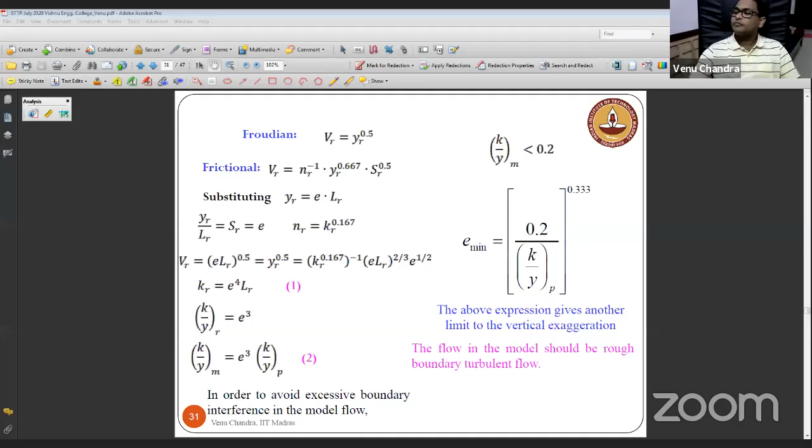So the title, as I said, is how we do physical model studies. So first let me show some photographs.

So now if I want to estimate what kind of sediment load is coming in that water, and how this breaching happened. Breaching can happen due to overtopping, or through piping. What kind of breach, because this is also similar to your dam break analysis. So if I want to generate data for dam break flow analysis, because most dams across the globe are old, then somewhere either today or tomorrow or down the line a few years later, you have to break those dams. But breaking is not just like that. Once the lifespan of the dam is over, you have to smoothly remove it from that location without affecting the downstream areas, the public, and the properties. So now the issue is how best you can create the model.

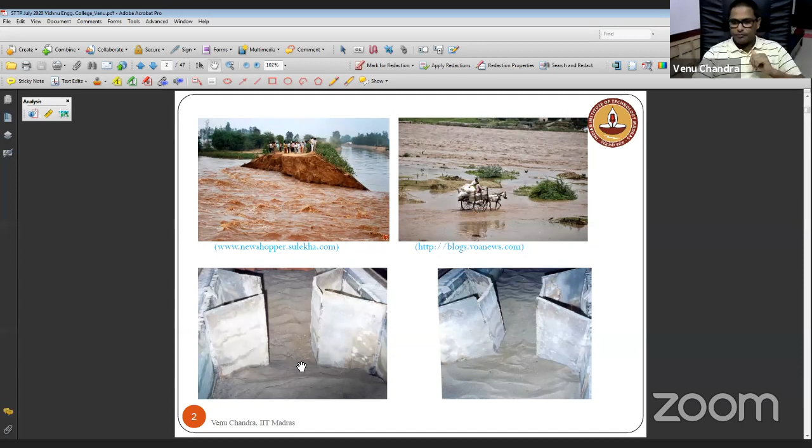No, sir, it's good. Perfectly all right, sir.

So now, who has decided the bridge has to come on the right side of the existing one? Who has decided how much clearance it should have from the existing one? Who has created the spacing of the two supports, or the span of the bridge, deciding it should be this kind of length? And who has decided what kind of footing you are going to prepare?

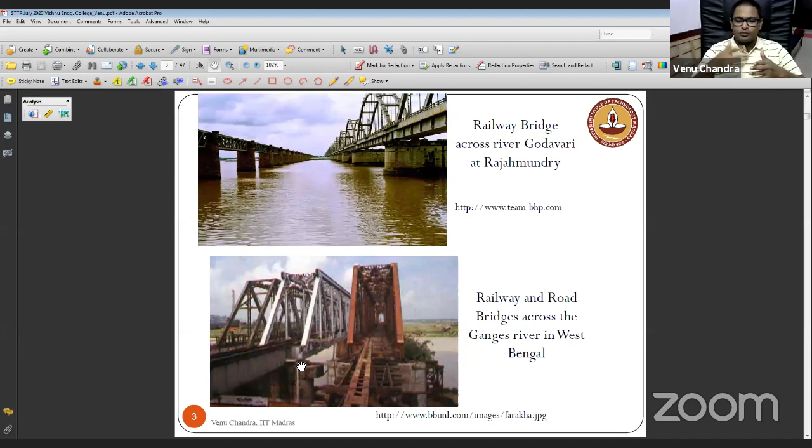Because this is a kind of double D arrangement, with the bottom well, and above the superstructure another double D pier. Now look at the bottom one, it is from West Bengal, a bridge across the Ganges, where very closely so many bridges are there. That means all these supports act like a group of piers. So who decides all these?

This information, or these suggestions, comes from the hydraulic person who does the experiments in different scenarios and finds out what should be the clear spacing between these two piers, or the distance from the existing pier. They give the data, and based on their input, the design is made.

This data then goes to your geotechnical engineer, and later it goes to the structural engineer. All these people work afterward, but the initial job is by the hydraulic person.

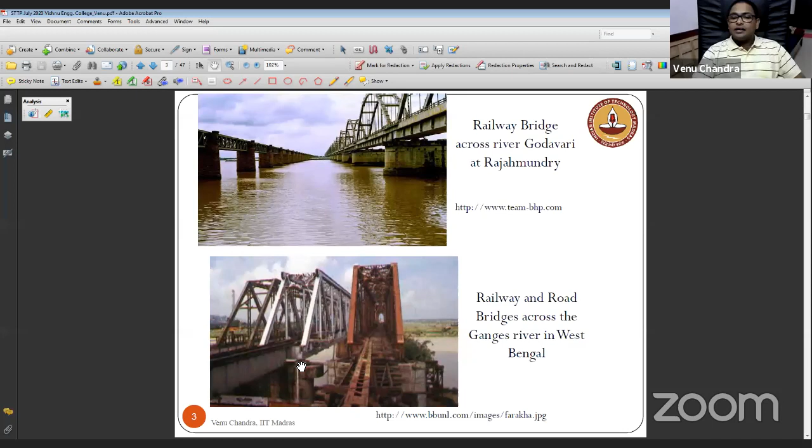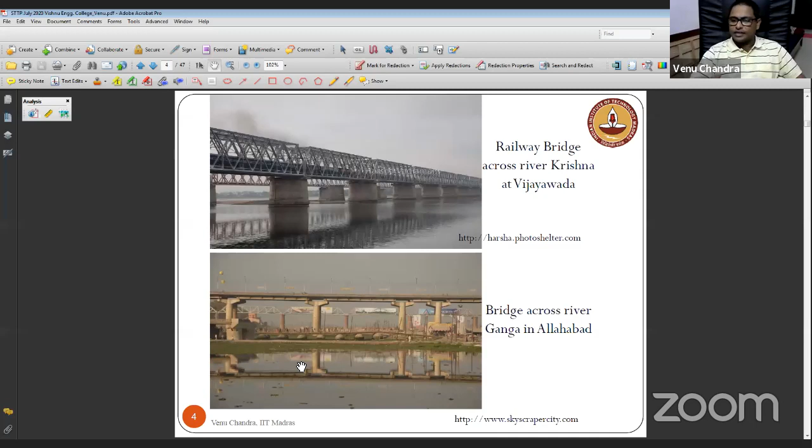Wherever the hydraulic structures, or constructions in contact with water, are concerned, we take care with liquid models. For air models, although the principles are the same, the aeronautical people do it.

Basically here we are talking about measuring velocities, measuring pressure, measuring viscosity, both in liquid models as well as air models. We measure velocities, viscosity forces, surface tension forces, and what kind of friction things are happening there. All these things we measure in physical models based on our requirement.

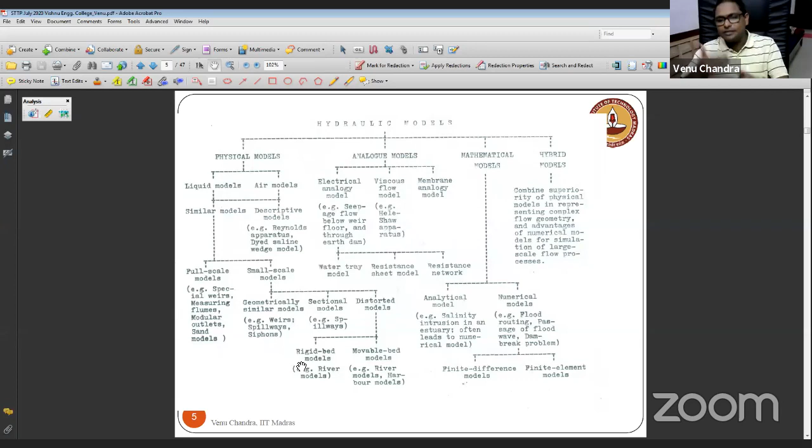You might have studied the gravity force, because the flow is happening due to gravity, so the gravity force is the predominant force. People consider only the Froude number model law, but don't ignore your Reynolds number and also the Weber number. The Reynolds number you consider during your model studies should be as high as you can, so don't only focus on the Froude number.

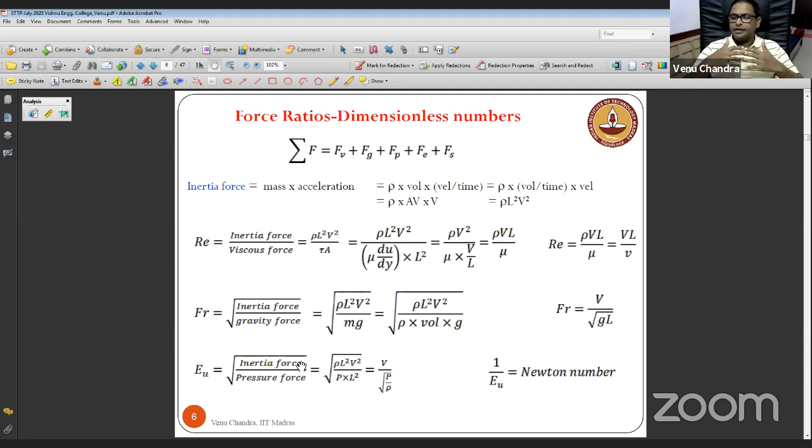Your Weber number should also be high. We are keeping the Reynolds number and Weber number slightly higher because if I want to neglect the scale errors, then it should be really high.

So then what is the procedure? The procedure we are following is: you just leave the bed after leveling it just like that. I'm not going to touch anything on the bed.

The concept here we developed is, if you have two rivers, both of them merging together at some location. The lateral river can join perpendicular or maybe at some angle, it doesn't matter. Then this is your main river.

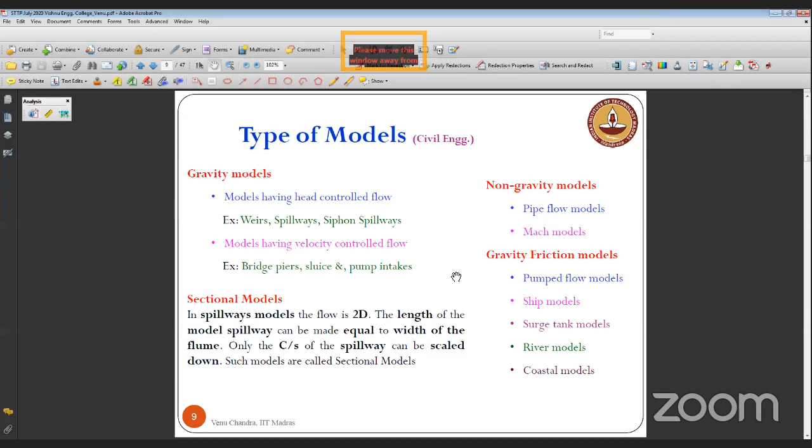So what do you mean by the gravity friction models? That means you are considering the Froude model law and also the viscous model law, that is the Reynolds number. So both the numbers are equally important here. That is actually gravity friction models, but it is slightly difficult. I will tell you how to do that.

Now, as I told you in the earlier slide, you need to take the high Reynolds number, high Weber number when it comes to the river models. Now, if you look at this slide, here horizontal scale and vertical scale I have considered. This I will move through quickly.

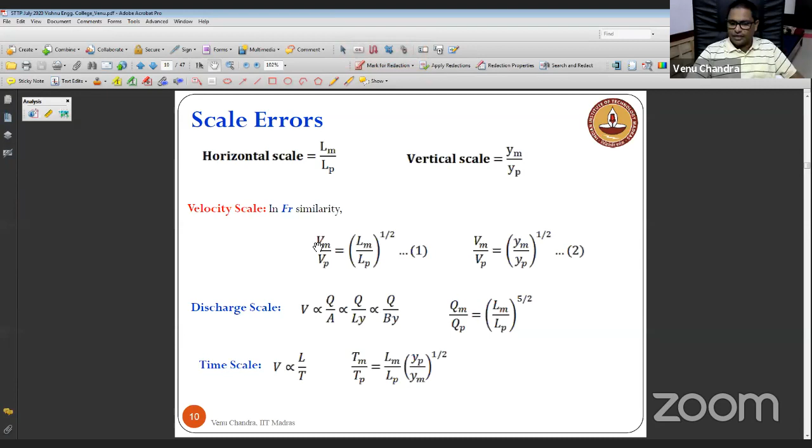Based on the Froude model law, the equation is VR equals under root LR, and based on your viscous model law, you get VR equals nu R divided by 1 by LR. So this is changing.

Now if you look at the example here, if your LR is 1 by 100, then the Froude model law will give you a VR of 1 by 10. But when it goes to the Reynolds, then it is 100 by 1. So there are contradictory things. It is not very difficult if you are rich enough, and if you have a lot of funds from any sponsoring agency.

So you can use different kinds of fluids, both in the model as well as the prototype, then you can create the model. But actually it is not advisable. That's the reason why you have to increase your Reynolds number in the experiments.

So if you ask me what Reynolds number I use for this kind of model study, the river confluence model, it is more than 30,000. That means the flow is highly turbulent. So once it is highly turbulent, then I am neglecting the viscous force. That is the basic idea.

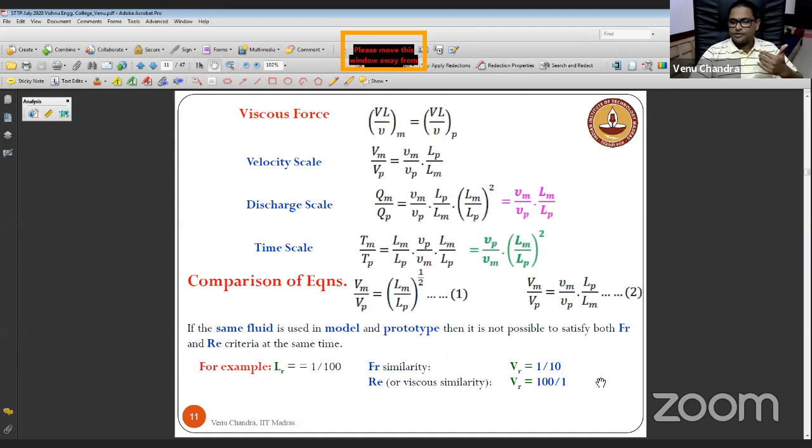Now what we are going to do is the model testing based on the dominant force, but without compromising on the scale errors. So you should minimize the scale errors. If you consider the turbulent flows, I am going for the gravitational force as the predominant force, and if I am going for the ship models, then gravity as well as the viscous forces I am considering.

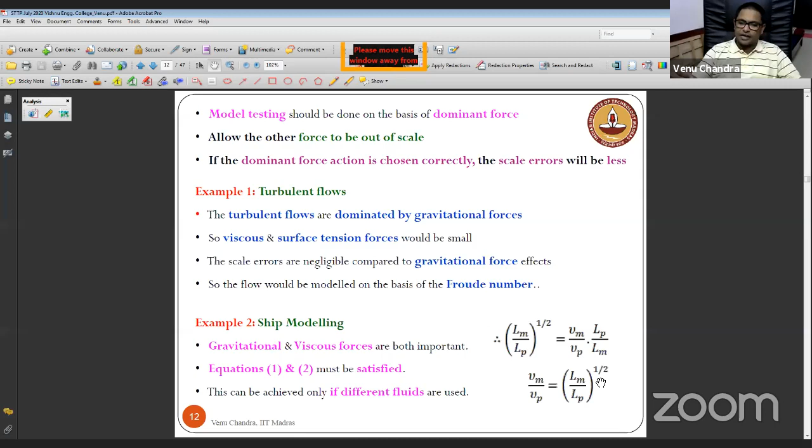But here there is a slightly different mechanism to measure the viscosity of the model in the frictional models. Now the other thing is, when it comes to the techniques, what kind of techniques I have to use to go for the model studies.

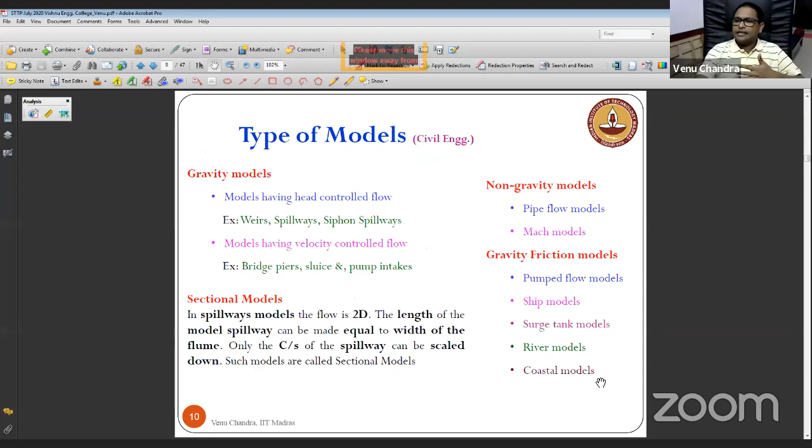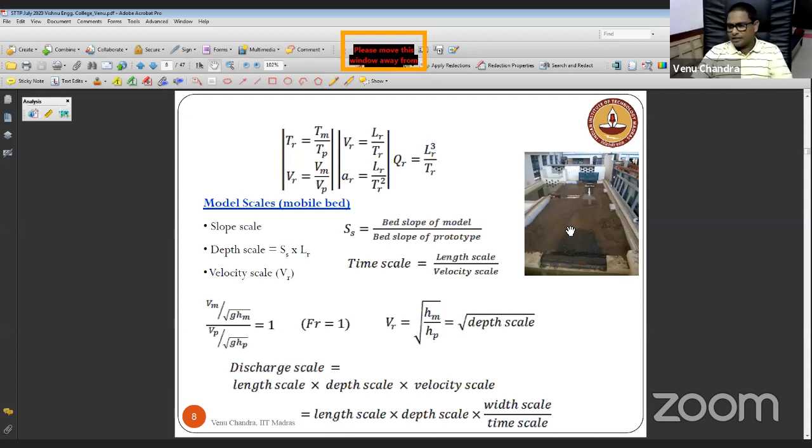So the first one is, you have to construct a watertight basin, then make arrangements for the flow measurement. If I maximize, maybe I can make it a little bigger. I hope this screen is much better - I'm sorry, I didn't know the screen was short.

So anyway, here in this figure, in the downstream we have one V notch, and here one more V notch, and this side also one V notch. Two pipes are coming, and then I can fix a flow meter to this one. So that means for the flow measurement, I am making the arrangement.

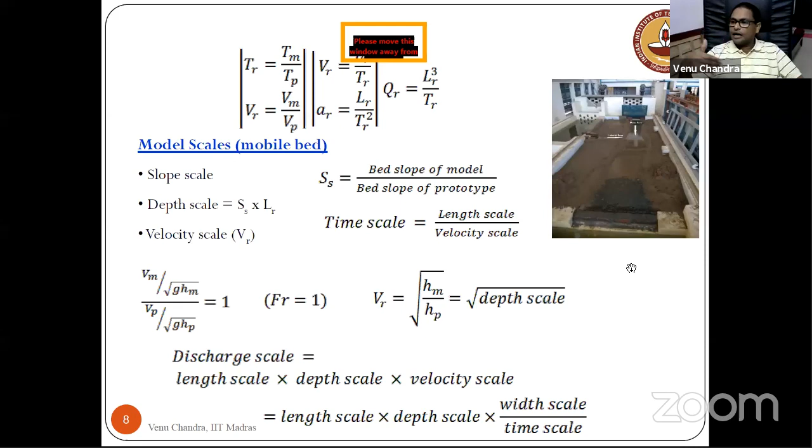Then once it is watertight, what you need to do is calibrate the model - that means whether it is giving good results or not. Once your model is calibrated, and once you develop the confidence that it is giving the exact results, then you can collect the data from your model.

Then what kind of material you can use here - you can use plastics, acrylic sheets, fiberglass, wood, metal plates, stainless steel, or you can also use wood with a kind of paint, otherwise the wood will get damaged.

When friction is your main dominant measuring parameter, you have to see what is your prototype friction and what is your model friction. If using cement mortar or wooden material, what we do in the lab is paint it, because in the field, Manning's N, the roughness coefficient, is about 0.01 to 0.03, which is very small. In the model it should be much smaller. To get that, you paint it and make the surface smoother. Sometimes we varnish the surface first and then do the painting.

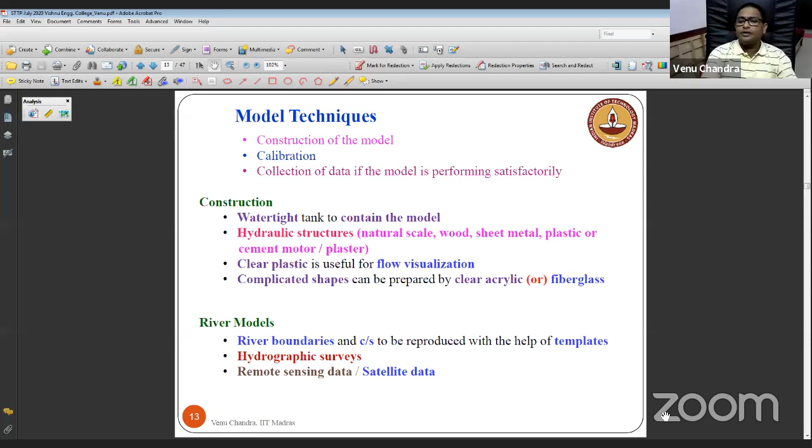Okay, so the model technique here is: initially you construct a watertight chamber. Then if the bed is mobile bed, meaning you put some sediment, or otherwise the bed is rigid bed, in both cases you have to bring your field N value to the model. The N value varies in the prototype from 0.01 to 0.03, and in the model it should be much smaller. So what we do is make the surface a little smoother, either by painting it or applying varnish if using wood material, and if using cement mortar, you definitely have to paint it.

Other than cement mortar and wood, what kind of material can you use for flow visualization? We use acrylic sheets or fiberglass, because you can really look into the flow dynamics and easily measure it. We also use stainless steel or other metal plates, because metal plates can usually be molded. Wooden things sometimes are a problem.

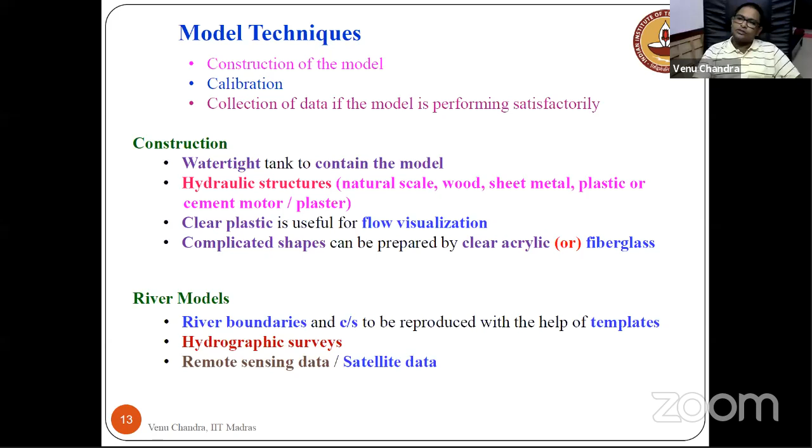So then your objective here is to measure the water depth. You just paint the entire surface and make it a little smooth, because friction is not the issue for you. Make it as smooth as you can, then start allowing the flow and measure the flow depths at different locations. Sometimes, if you go to the field, you are unable to collect the data.

So for that kind of data, we use satellite information. Now this is one setup we created at the Hydraulics Lab. Here you can see one is coming here, one you consider as a river. A V-notch I provided here, and then one more V-notch, and the backside pipe is there. I can put a flow meter.

Then in between, I can keep some baffle walls so that I can reduce the turbulence. Then on this side you can see a kind of channel, the trapezoidal channel, through which the water is going. That channel I consider as the intake canal.

So you are drawing the water, and this idea we got from Vijayawada, where there is a thermal power plant. They are drawing water from the Krishna River. So what kind of sediment load comes here, which is the problem of decreasing the discharge in the intake canal, and how to minimize the sediment load.

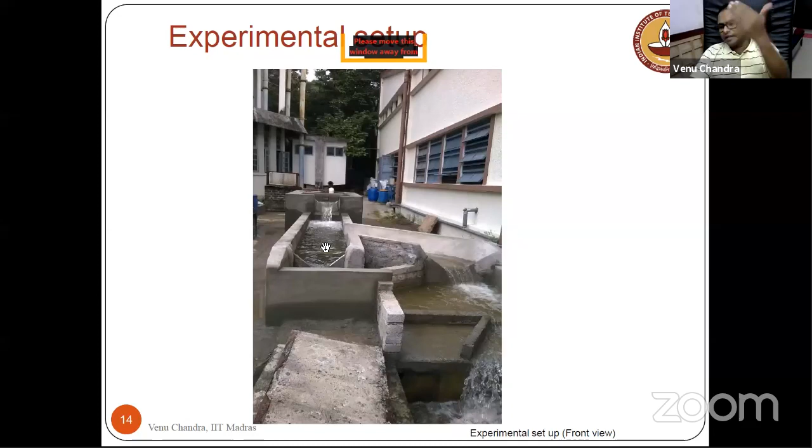This is related to that study. You can collect all the sediment here, and otherwise in the channel, you also collect data from here. In that way, our objective is to find out and minimize what sediment load is entering into your intake canal.

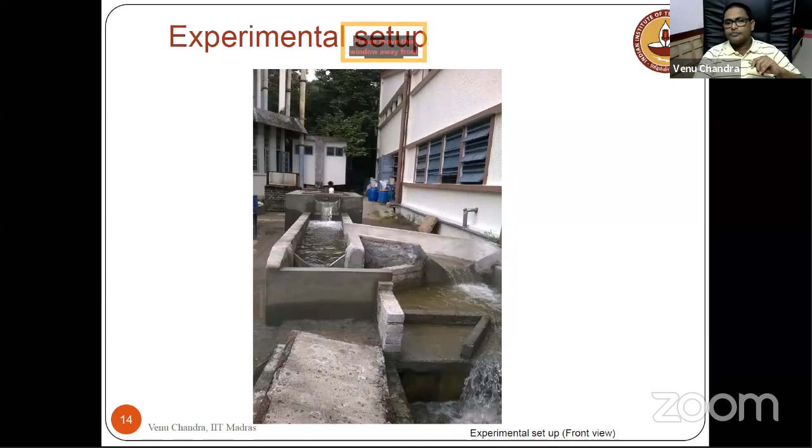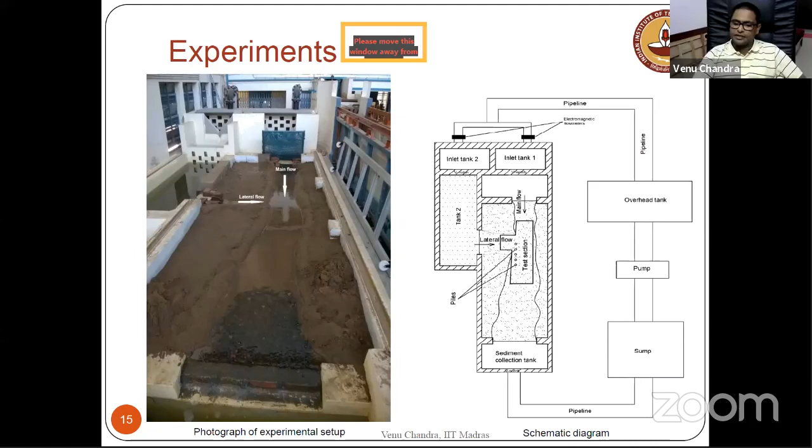You can also read this paper, which came in an ASCE paper. You can look into my profile and go through it. This is also like a river model, as I told you, the confluence model. This is also in my profile, you can check it. How we prepare the model, what are our scales, how we develop the experimental setups, everything you can find out from the papers.

These are the flow meters I was talking about earlier. You can fix the flow meter to these pipelines. Nowadays the price is also not very high, so you can easily fix it. But while fixing, the flow meter should be vertical.

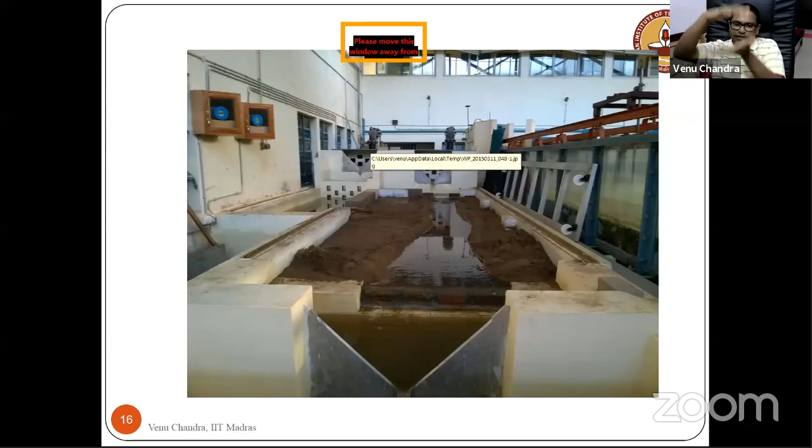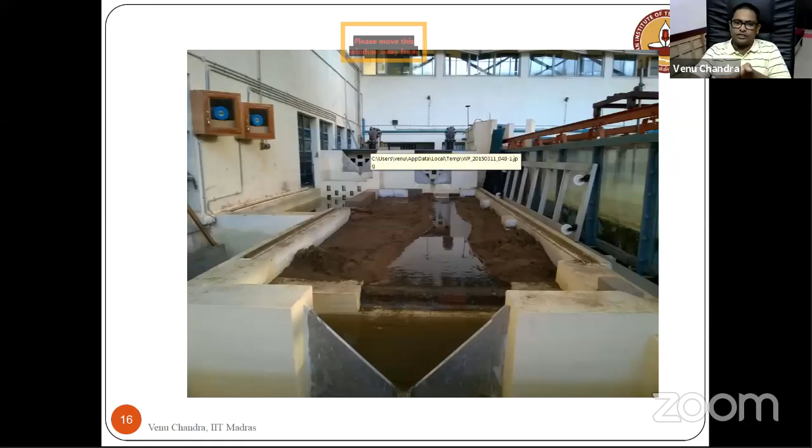That means the water should fill the entire cross section of the flow meter. If it is horizontal, the water level is half full in the pipe, then you cannot really get the values. This you can continuously monitor from the display unit.

If it is the rigid bed model, that is nothing but your roughness, and then the sediment particle. In the rigid bed, the roughness of the bed is offering the friction. If it is the mobile bed model, the sediment is offering the friction. So in both cases, this KR or DR is one and the same.

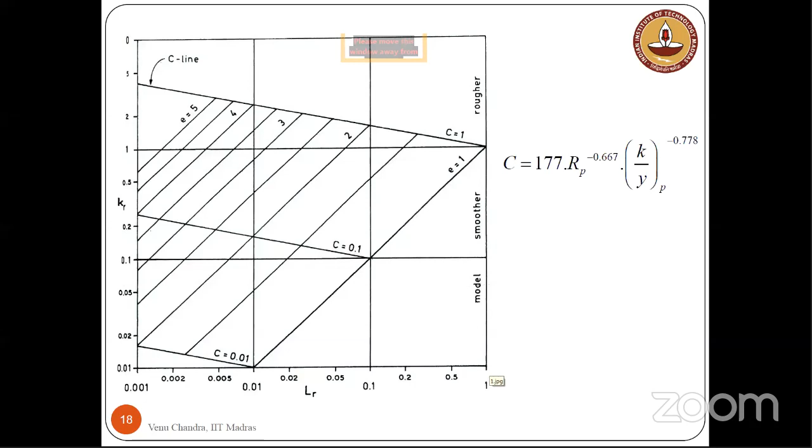This E stands for vertical exaggeration as a function of the depth scale as well as the length scale. Now, how are you classifying your models? If you go for rigid bed models, your main agenda is to measure flood levels, or to find out the capacity of your channel, or to see the propagation of the flood wave, how the wave is coming.

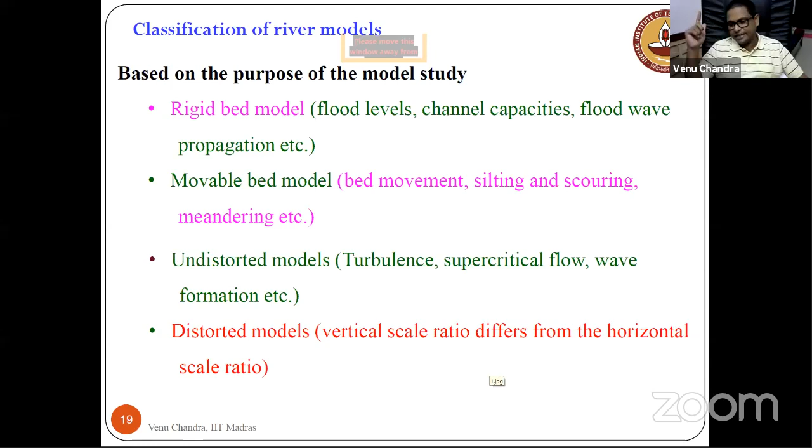But the main issue with undistorted models is the Reynolds number. The Reynolds number drastically comes down if your length scale equals the vertical scale. So you try to keep your vertical scale different than the horizontal scale, then you can increase your Reynolds number. Once the Reynolds number increases, by the formula rho Vd, that means velocity is high.

So that means you are going for turbulent models, so you can minimize your scale effects. Now, what best can you do? You try to keep the turbulence as high as you can. Otherwise there are two issues. One is the velocities will come down, and once the velocities come down, the sediment particles cannot move, but in real conditions the sediment moves when the flow is happening.

That is number one. Number two is, once you make the length scale equal to the depth scale, your flow depth in the model will come down. Once the flow depth decreases, you cannot measure the velocity data properly. So you need sufficient depth. These are the two important things, so please keep them in mind.

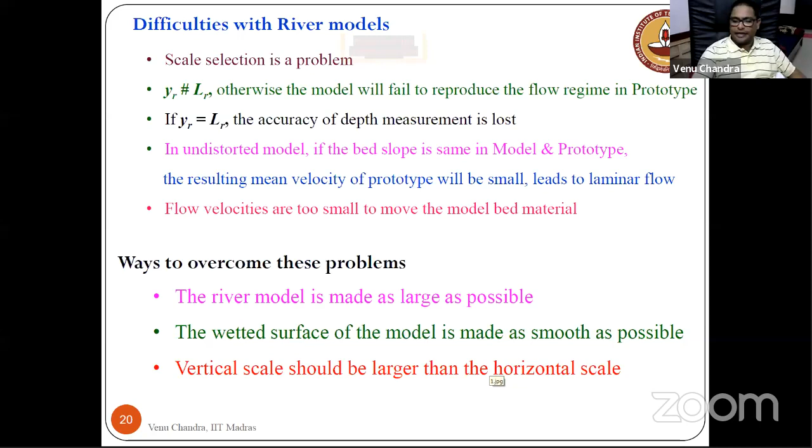Normally we use the length scale in the range of 1 in 2000 to 1 in 100. The earlier model I showed was 1 in 80, that was the vertical scale for that sediment model.

As I told you from the plot, the vertical exaggeration E is a function of depth scale and length scale. You can use different vertical exaggeration values for different models, but it is not a hard and fast rule, it can be adjusted as per your local requirement.

Now, from where have all these resistance formulas been developed? This is a bit of background. Initially for river flow resistance, we didn't have any equations as such, so we started using the existing equations developed for pipe flow for our sediment transport models.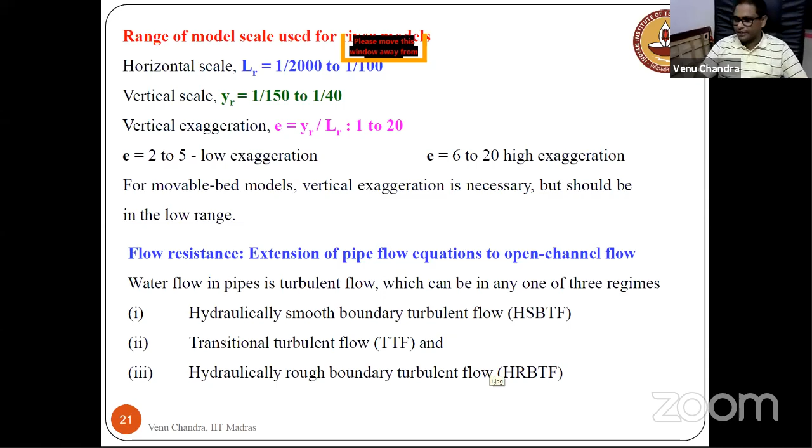What are all the equations we have for pipe flow? The hydraulically smooth boundary, where the boundary is smooth but the flow is turbulent; the rough boundary with turbulent flow; and the transitional turbulent flow. These are the three cases we use.

One minute, something is coming here, some box.

You can see the Darcy-Weisbach equation: HF is equal to FLV square by 2gD.

Then if you consider the hydraulically smooth boundary, but the flow is turbulent, you all very well know from the Moody's diagram. So from the Moody's diagram, what we are going to do? The Moody's diagram tells the friction factor F depends on the Reynolds number, that is one.

The second one is the K by D, or otherwise epsilon by D, or otherwise epsilon by R, where R is the hydraulic radius, or otherwise the hydraulic diameter, or hydraulic mean radius, whatever you call it. So D, or epsilon by R, that epsilon talks about what is the roughness.

Generally what happens, if you see the roughness, any broken pipe near to you, if you just touch the surface, there are small bubbles coming up. So it is having some kind of undulations like this. Then you take the mean value of the projections of the roughness. That tells you what is the equivalent roughness, so that is your K value.

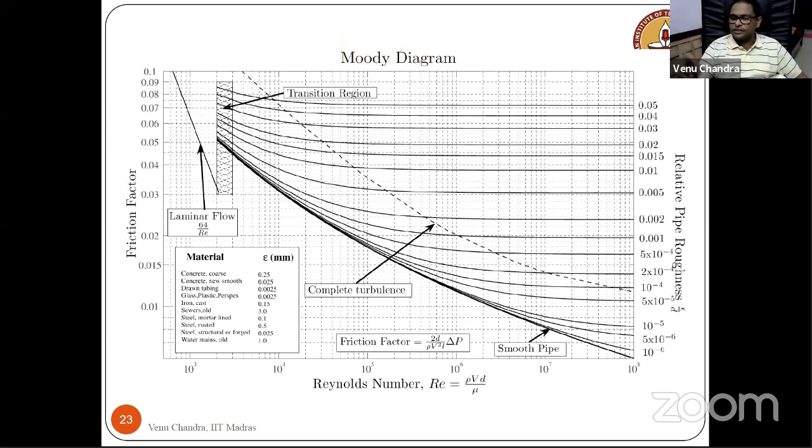So my friction factor depends on both the epsilon by D, or epsilon by R, and the Reynolds number. These are the two different things for the smooth, turbulent, or the transition region.

Then in the box also you can see different kinds of material - steel, mortar lined steel, rusted, water mains, old pipes, concrete, or otherwise the bed is smooth. So you can see all kinds of ranges here.

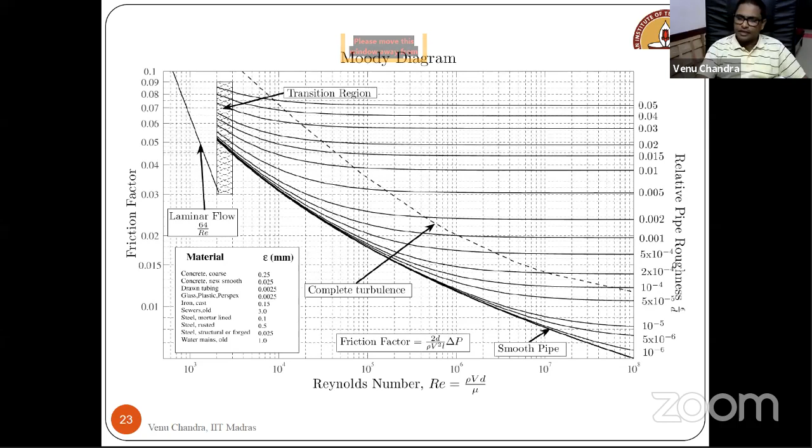The same thing, what we are going to do is use these things to develop our movable bed models. Now in this slide, the other equations you know from your basic fluid mechanics background, but you just try to concentrate on equation 1, given at the bottom.

Here in the center, I am saying the Reynolds number should be higher than, or greater than, the turbulence Reynolds number. So try to remember these subscripts - RE stands for the Reynolds number, and RT stands for the turbulence Reynolds number. Here the Reynolds number is there in the model, and Reynolds number is there in the prototype. But in both cases, your Reynolds number should be greater than the turbulent Reynolds number.

This turbulent Reynolds number is a kind of empirical formula, which we can get from the above equations. So the RT is 800 divided by F, which stands for the friction factor, and K stands for your particle diameter, or surface roughness, then R stands for your hydraulic radius. So from here you can get it - the turbulent Reynolds number is a function of your friction, the particle size or roughness, and your hydraulic radius.

So I am giving everywhere the equation numbers, so you try to use those things. Once you finish the lecture, if you want to solve some problems, you can recall those equations.

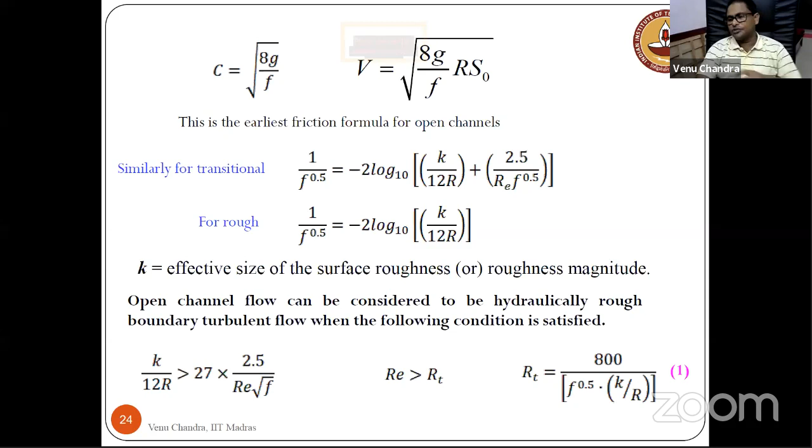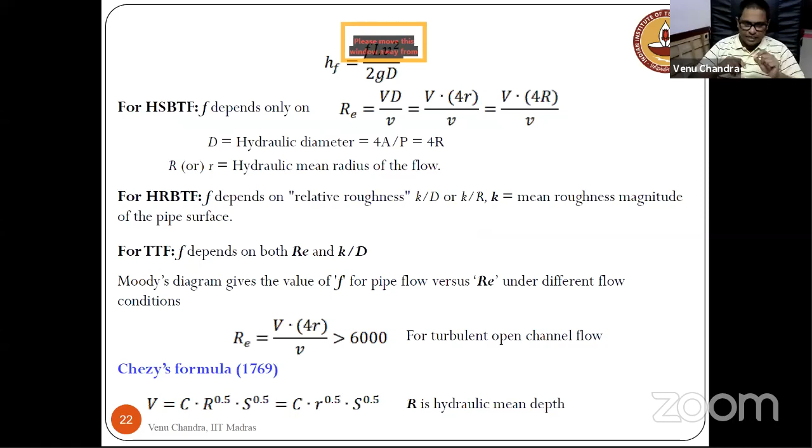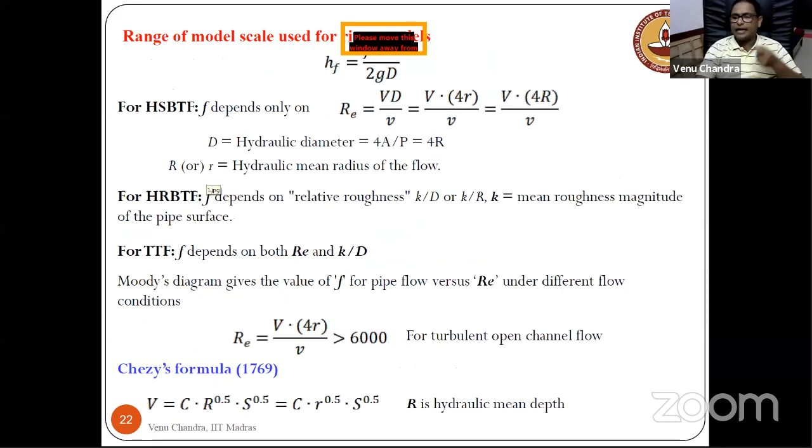So now our job is to find out what is the upper limit and lower limit. This Manning's formula, Chezy's equation, and all, you know it very well. Now this N stands for the Manning's roughness. So this N, how to find it out? Once you use these equations, you get equation number 2, and for rough boundary from the pipe flow, I'm taking this equation.

Now, if for different values I fit the F and then the R values, I can get a kind of power equation in terms of equation number 4. So this power equation for the friction factor, if I substitute in this second equation, slowly I'll narrow down to...

An equation N equals K to the power of 0.167 divided by 26. This is your equation to find the Manning's N. The same equation you can use if it's a rigid bed model, for the friction or roughness, and if it's a sediment transport model using sediment as the bed, then you use that equivalent, or otherwise the D50 value. If you are using D75, the denominator will change. If you use D50, you can use D50 in place of K, so that's how my N value is obtained.

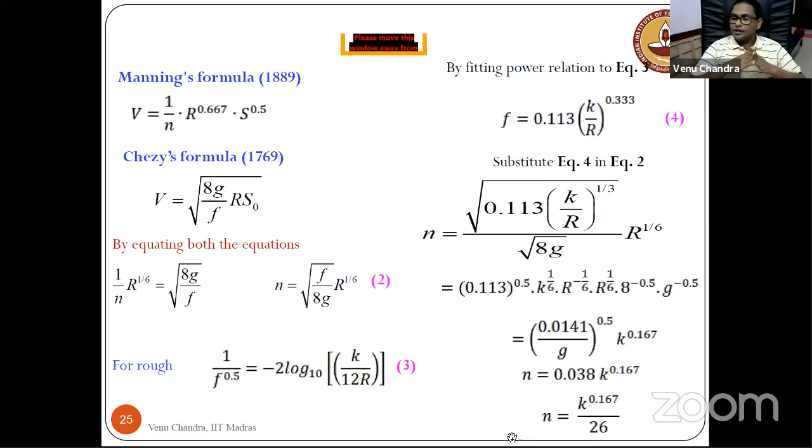So like that, we are going to develop certain equations. If you are using sand or gravel bed, the D should not exactly be D50, it should be 75% finer. If it is D50 you are using, then you use 24. I hope I'm not going too fast. When it comes to the equation, anyway, the slides will be with you, so you can leisurely read those things.

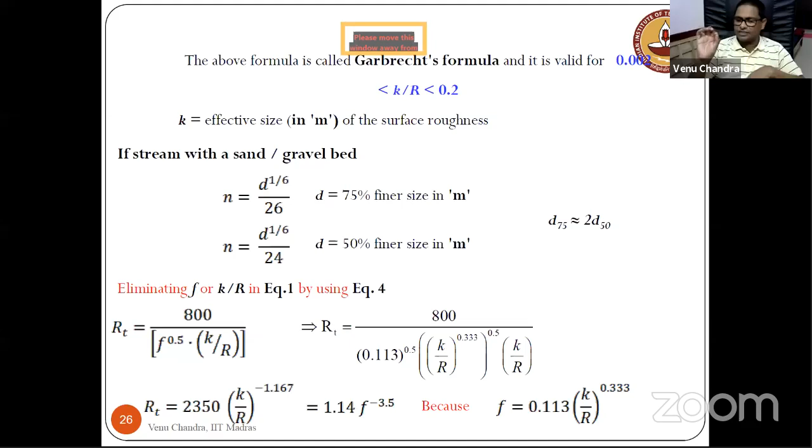Now, as I explained earlier, the most important thing is to find the turbulent Reynolds number of the model as well as the prototype. Your model Reynolds number should always be higher than the turbulent Reynolds number. Now, why do we use distorted models and the turbulent Reynolds number? It's very simple, as I told you earlier: you maintain turbulent flow in the model to help the sediment move.

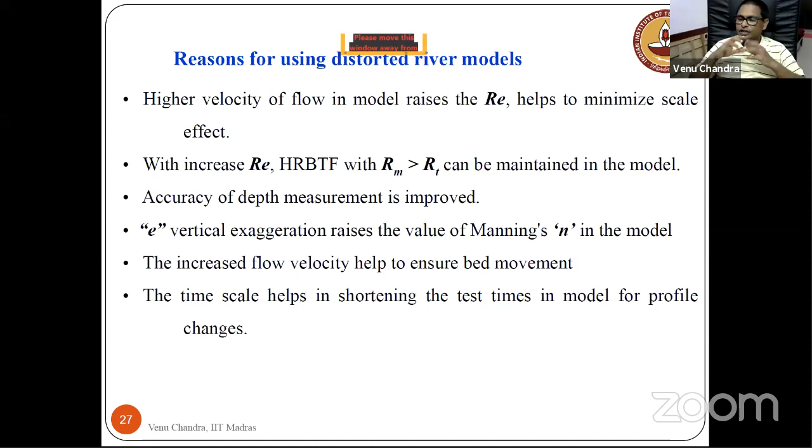So it means the bed shear stress is going to be maintained. The third reason is, if you maintain it this way, you can get sufficient depth so that you can get the velocity measurement, and also you can increase your velocity for the bed movement.

Now you see the Reynolds number of the prototype I am considering initially. Then the Reynolds number of the prototype I am writing, where 4yp is nothing but rho Vd by mu, and here I am considering nu, where my D is 4 times the depth of flow. That comes from the pipe flow - the hydraulic radius equals A by P, wetted area divided by wetted perimeter. From there I got this one.

Then I know my Kp is 26 times Np to the power of 6. This I got from the earlier equation. Then K by Y, I can fix it.

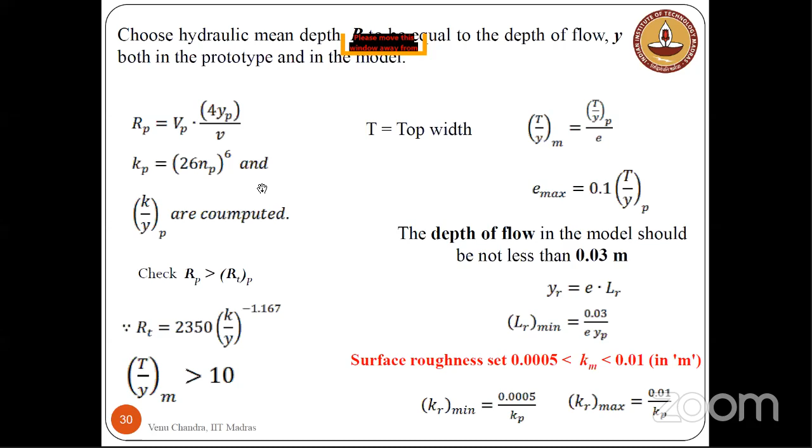Okay, so then I have to check if my Reynolds number of the prototype is higher than my turbulent Reynolds number or not. So this is the equation we have.

Then there are some equations like this, some thumb rules. Based on previous experiments, people have developed certain thumb rules. One such thumb rule is that the top width of your model or prototype and the depth of flow in the model should always be greater than 10. This is only to avoid experimental difficulties.

Now, once you have this from the vertical exaggeration equation, you can write this. So from here, if I consider this as 10, then E max, one limit you get is 0.1 times T by Y of P. That means the E value you get - knowing the top width of the prototype and the depth in the field - you can calculate that.

Then the other consideration is, what should be the minimum depth of flow in the model? Normally we always keep it greater than 5 centimeters, but the literature says you can go up to 3 centimeters, provided you have sufficient, latest equipment to measure the velocity.

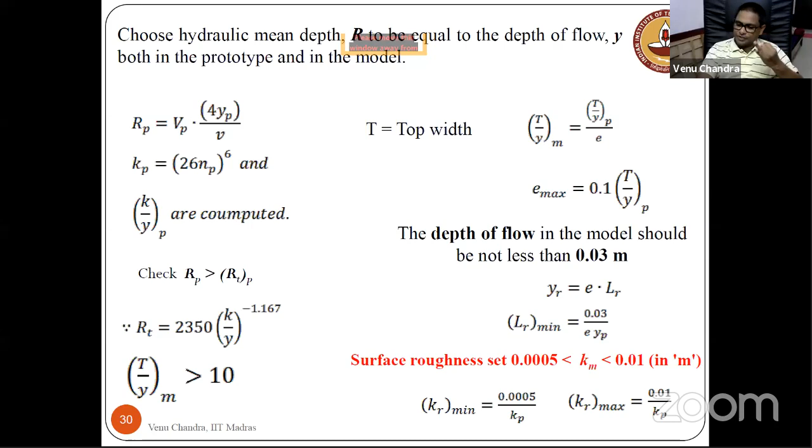It all depends on what kind of scales are available, like the space available in your lab, and what is the water availability in your lab. Based on that you can fix your LR maximum. So LR we got, that means the x-axis is finished, the y-axis is also finished, and E max we got.

Then you will get a kind of E minimum based on your Froude model law and the frictional model law. For the frictional model law I am using Manning's equation, and for Froude model law I am using the Froude number. Using these two, and substituting the vertical exaggeration, which is nothing but your depth scale divided by L scale, once you substitute everything you get a kind of E minimum, provided K by Y of the model should be less than 0.2.

So this is a thumb rule, I have given two thumb rules, one thumb rule here, and there is one more thumb rule. Once you follow this, you will get a kind of E minimum. So E minimum you got, E maximum you got, then KR minimum you know, KR maximum you know, then LR minimum you know, LR maximum you know.

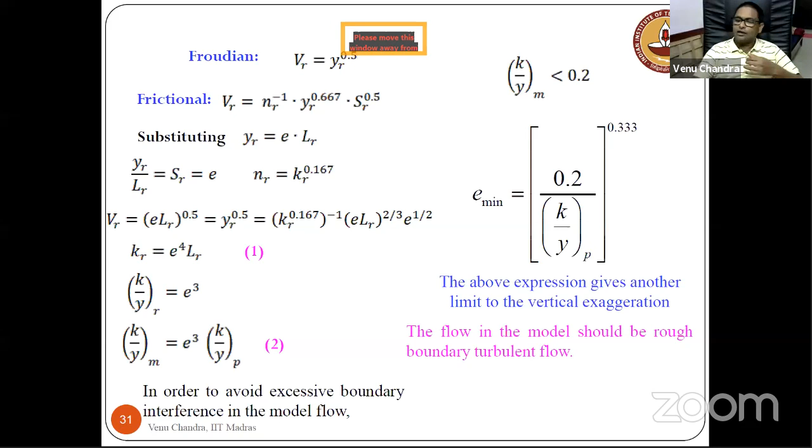Then what is the C value here? As I told you earlier, the C value purely depends on the Reynolds number of the prototype. That means you only have to use prototype field values to get the C value. Now I am considering the Reynolds number and the Froude model law. From there I am getting RER, that is the Reynolds number ratio, equal to YR to the power of 3 by 2, and YR is E multiplied by LR.

Then the Reynolds number of the model should be greater than the turbulent Reynolds number, so that equation I am considering. Then RER also should be greater than this one, so I am using equation number 2.

Then from here I can straight away get the equation for LR minimum in terms of vertical exaggeration. Then after eliminating the vertical exaggeration, whatever factors or equation is there, this is my C. So getting C is very easy. Now you see, Reynolds number of the prototype, you know the field velocity, you know the hydraulic radius, then you can get it.

There is only some coefficient, 177, and K is nothing but your field particle diameter, and Y is the depth. So you can calculate what is the C value. And how to use these equations, I have given two different examples in the same presentation, which will be shared by Girish later to you. So we can go through that, and I have given examples of how to solve those things.

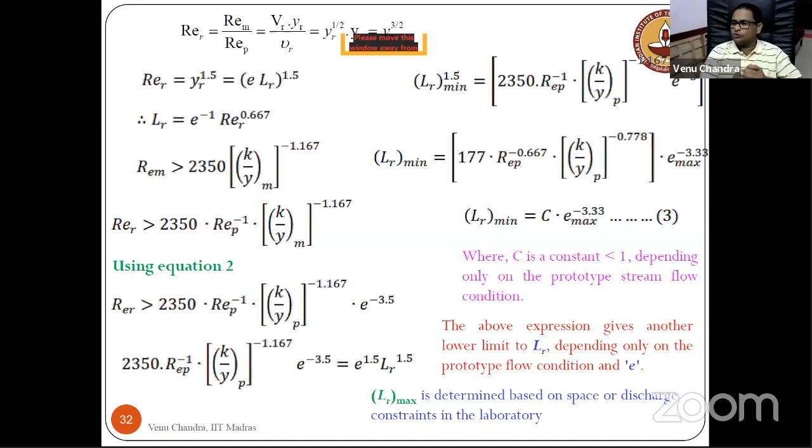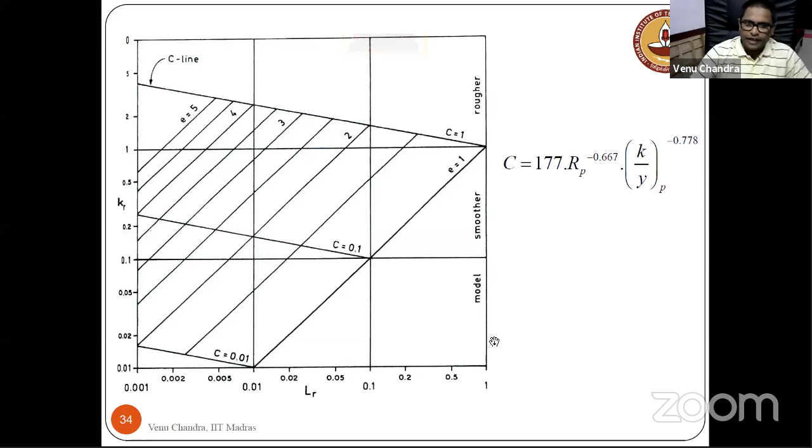So C value is there, now everything you got it. These are some supplementary equations, you can go through them. Now C value you know, LR minimum you know, LR maximum you know, KR minimum you know, KR maximum you know, E minimum and E maximum also you know. Now somewhere here you will get a kind of box.

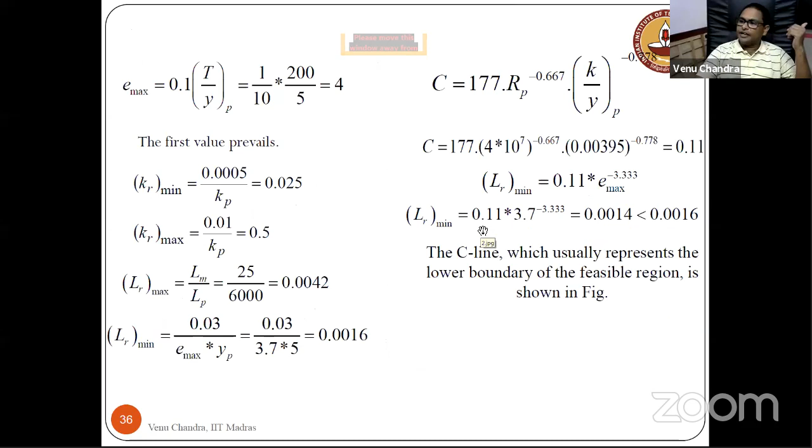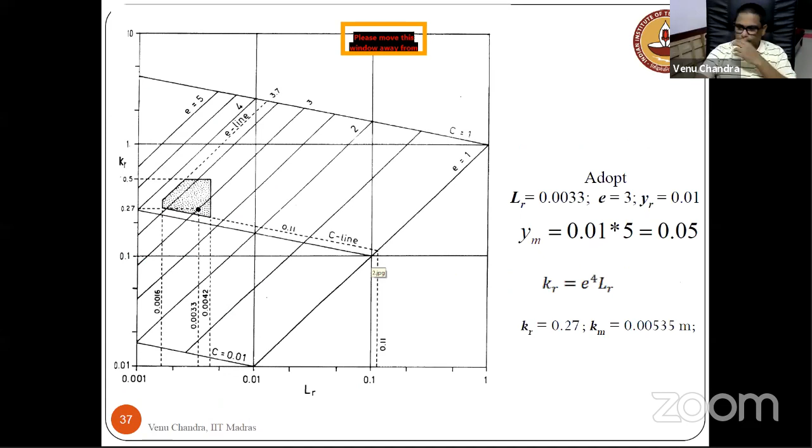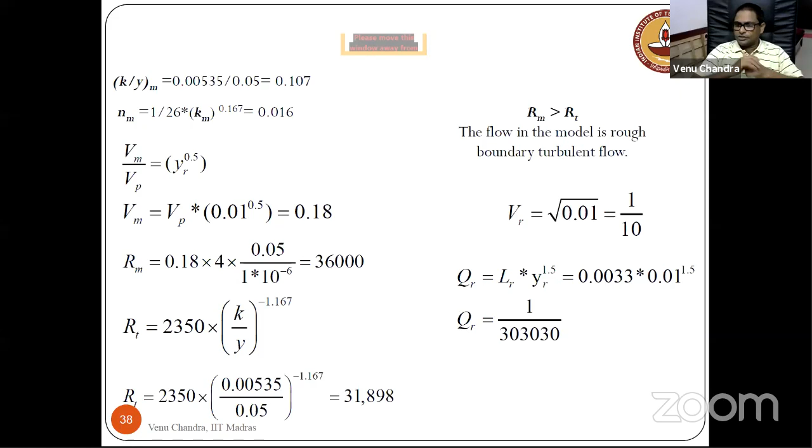I hope if you have any doubts, just remember, I will address it later. Once you know the KR values or KM, the rest is how to find out your scales. Ultimately, our main thing is for my model, what should be the discharge, what is my length ratio, what is my depth ratio? So I'm getting the length ratios, depth ratios, and also the discharge ratios. So this is the thing for the rigid bed.

Now for mobile bed, you have a slightly different approach. What you have to consider is the densimetric Froude number, or otherwise we also call it the Shields parameter. You have to consider the Shields parameter as one of the important things. And you know gamma R S naught, this equation from open channel flow, that is to find out the bed shear stress. You can use gamma R S naught, but here SF we are considering the frictional slope, not the bed slope.

You know it very well from basic hydraulic engineering how to take the frictional thing. For the Manning's equation, for unsteady flow, you consider the slope as the friction slope. So when you want to find out the length of the backwater curve, that is nothing but your frictional slope, not the bed slope.

Now the densimetric Froude number: here this is the specific weight of the water, specific weight of the sediment, V star is the shear velocity, G is the acceleration due to gravity, and D is the diameter of the particle. This should be in the range of 0.056 for the incipient sediment motion, meaning it should be a minimum of 0.056 in order to make the sediment in your model move. That means you are creating the actual field scenario.

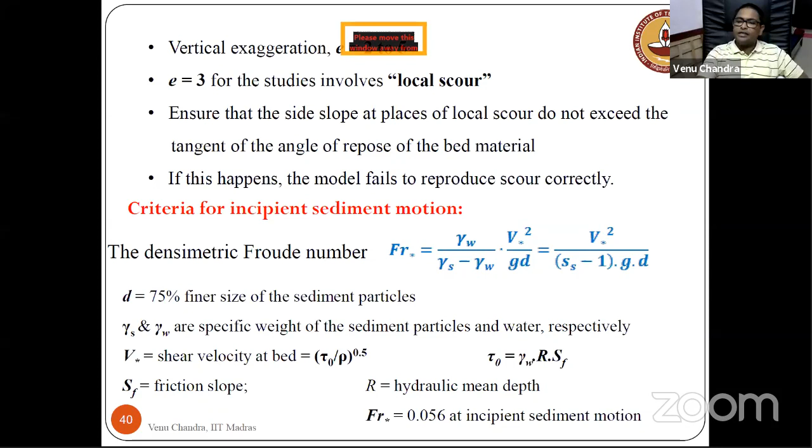These equations are just a repetitive thing, you can just go through it, it's easily understandable. But here what I want to emphasize is I am talking about the Reynolds number star. The Reynolds number star is nothing but the particle Reynolds number, so here you have to use the particle properties, meaning D is the particle diameter.

It should be greater than 70, as I have given here. But in any case, it should not be less than 4. So these are certain values we should remember: it should be greater than 70, but in any case not less than 4. That is one condition.

Then there are 4 different kinds of approaches to find out the particle diameter. Once you are talking about the sediment particles, the earlier equations are all applicable for the mobile bed also, but the only difference is the friction means bed friction, but here particle friction. So the particle friction means you have to find out the diameter of the particle. In the prototype you know the diameter of the particle, and in the model you should get it.

For this, we have the Froude criteria, Reynolds criteria, friction criteria, and one more criteria, the shear criteria. If you look at the Froude criteria, the Froude number should be equal to 1, meaning it should be same in both cases. Then this is the equation I have. From this equation, the R I am taking as YR, and this S is nothing but your change, that is height divided by horizontal length.

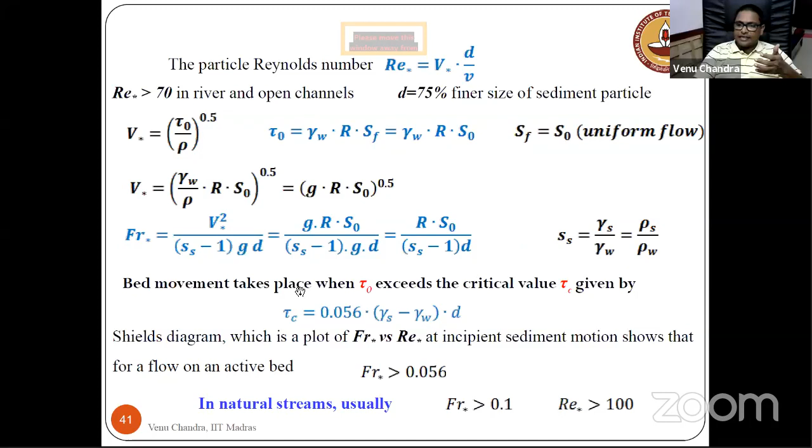So once you use this equation, and the densimetric Froude number equation, and this equation, you will get here like this. Then from here it should anyway be equal to 1. Then my dr is the only unknown. So this YR by LR is nothing but your vertical exaggeration. So I am bringing it in terms of vertical exaggeration and the density ratio.

Why am I giving the densities here? The important thing is sediment density. If suppose I am using coal dust in the model, I am not using the same sediment particles, I am using the coal dust. If I am using fly ash dust, then this density and that density is different. So I am taking the equation in terms of density ratios.

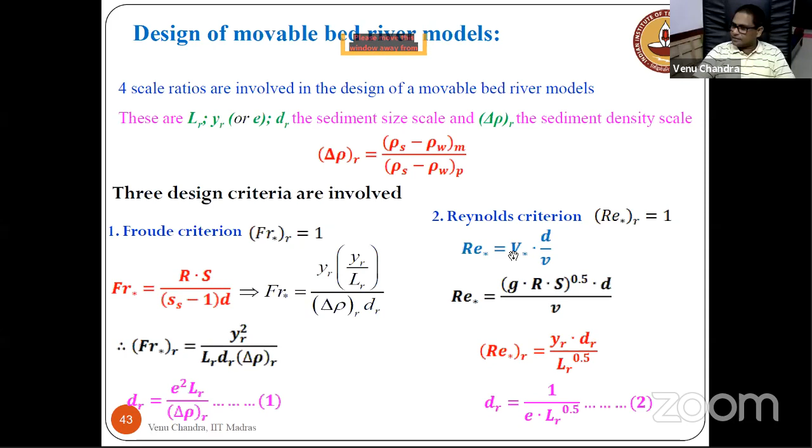So then this is the Froude model, the number 1 equation. Then Reynolds criteria, the same equation, Reynolds number you are using. Then you are developing one more equation, that is the dr, by considering the Reynolds criteria. Then you have the friction criteria, the third one. This friction criteria gives the equation dr by yr is equal to e cube. Then you are creating one more equation.

Then another equation we develop, based on the fall velocity, the settling velocity of the particle. Normally we don't use this, but it should be used. The fall velocity is the shear velocity - ws stands for fall velocity. Maybe you might have studied the Shields criteria, or the settling velocity, the Stokes law settling velocity of the particle. Those equations you can use to find out what is the WR.

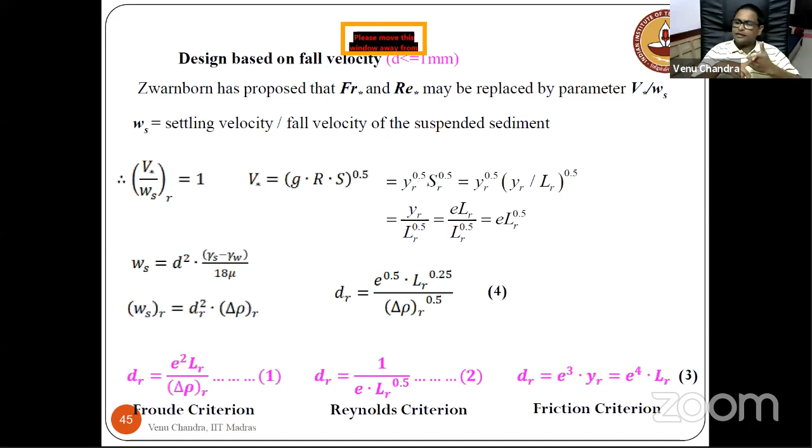So here this is nothing but your Stokes equation. Based on the Stokes equation, I am developing one more equation for the dr. So how many equations do we have here? One by considering friction, one by considering Froude, and then the Reynolds model, then the settling velocity. For this one also I have given one more example.

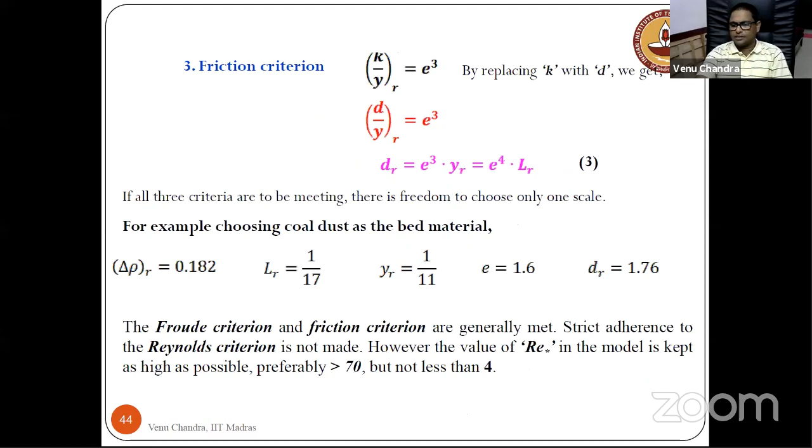And other than this, I have given 2 additional questions to Girish. Maybe he will share those with you, and you can solve them later. They are very simple - these kinds of questions we give to our BTech and MTech students. So I think you can also use those to solve or understand these things. But most importantly, try to understand the examples I have given after each model preparation. Then definitely you will understand.